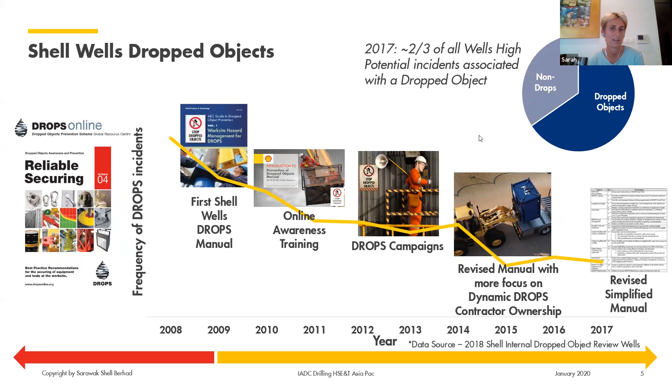Fortunately, very rarely do things land on people, and that's why we call it high potential, but it didn't actually reach its potential. So we got the answers to share to see what other companies see.

Yeah, they're on the screen. Should be. Are they not? No. Well, I can share that. Maybe you can just give us a... I'll do it again. Oh, there we go. Yeah, is there? Yeah, okay, great.

So similar to what you said, lifting and transportation of objects. So it's not just in Shell, it's good to see that it's actually a theme across the industry, which doesn't surprise me.

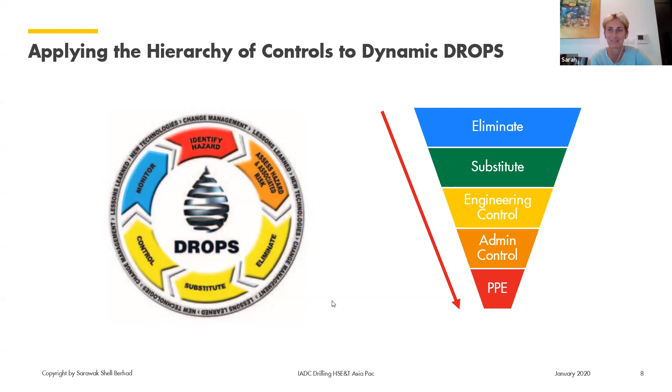Are the results on the screen now? Yeah, and now I can see them. Okay, so quite a lot of engineering controls—52% engineering controls, 44% eliminate. Okay, great, and a few admin controls. Okay, interesting.

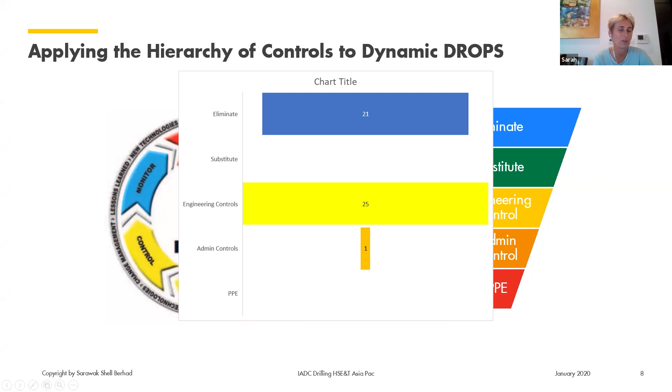Interesting, okay, so let me share the journey we've been on. Let me start with the next slide. If we talk about eliminate when it comes to dynamic dropped objects, this is the first program I'm going to talk about, called Let's Lift Less. This program was started by the Shell team in the UK operations. It's not a hard concept to understand: if you don't lift it in the first place, then you can't drop it. That's what we mean by eliminating—let's lift less.

Now, it sounds simple, but the team came up with six areas they wanted to concentrate on, rather than someone just saying 'No, I'm not lifting that.' Of course, we still need to be able to operate and drill our wells, so they came up with six areas. It goes through the whole life cycle of planning your work and your design, and you could say that actually this is really just good planning and management.

And it is, but it's putting that focus into actually the amount that we lift. If we lift less, we reduce our exposure. So changing the philosophy is embedded in that, and you want to put as much energy as possible into minimizing the lift. So don't put all the energy at the coalface, but think about it holistically from the bigger picture, and the energy you put into eliminating will pay off further down the line.

Deck management, obviously very important, having a deck plan, not playing deck chess, not moving things five times once it's on the rig. Put it where it needs to be and avoid moving it. But who do you need to collaborate with to make that work? Well, obviously the crews, they know where things need to be and where things need to go, and they'll also be fully aware of things you do that are crazy, that involve a lot of extra lifts.

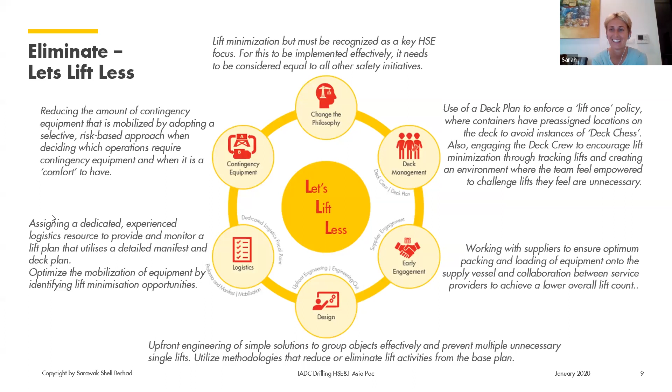Yeah, we'll share the results. Okay, yeah, 41% think we're doing more than 2,000 lifts a month, and that's right — we were doing just over 2,200 lifts a month on a jackup, so quite a lot.

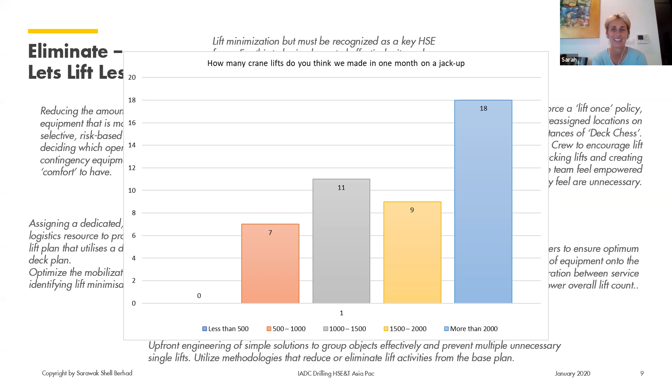So if you want to go to the next slide — it may seem quite crazy to count the amount of lifts we're doing, and trust me, it took some convincing to get the crane operator to count the lifts, because they don't really see what's in it for them. But what you're really trying to do is change this philosophy. If you don't measure something in the first place, how do you know you're getting any better? If you don't measure it, how do you communicate the size of the problem? When you're sitting in the office writing a drilling program and picking equipment, do you think this could involve 2,000 lifts and the exposure that gives to people?

Yeah, not necessarily. So you can see we split it up into lifts to and from the vessel, but also internal lifts. Some of the other sites split it up into deck lifts and lifts going to the rig floor, just to try and get that granularity to see what are the different lifting operations we're doing, and where potentially there's opportunities to minimise.

So part of their change in philosophy was all about counting. It's not a numbers game, but at the end of the day it gives visibility, and you can see the general trend. Obviously you're not doing the same operation every month, so it's not an absolute number, but the trend shows the improvements you're making.

When they looked at the 6 areas they wanted to focus on, some of the things they've been doing: we always do DWOPs for activities, but now when they're planning a well, they do a workshop, specifically around lift minimisation opportunities in each of their campaigns. They've been consolidating tools and loadouts from multiple service providers and multiple product lines into the same basket. On the design side, they've been mixing the mud onshore and sending it out pre-mixed rather than sending out chemicals and extra lifts, and working on backup tools, leaving stuff at the base if they can. It doesn't take that long to get to the rig, so really using a risk-based approach, and having an accurate deck plan and vessel deck plan has really helped them.

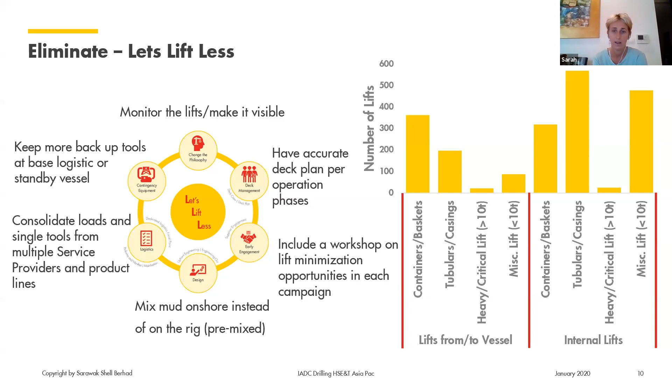Okay, let's go to the next slide.

So, substitutes - what does that mean? This is an example from Brunei, working with one of our service providers, Franks, running completions with a lot of control lines. On the left is typically what that would have looked like: 5 different control lines to run the completion.

That means we've got 5 sheaves hanging up there in the V-door, slung up. It also means to get those 5 lines next to the completion tubing, we need people to manhandle it in and get it around the clamp, so we've got 4 people there in the red zone at the rotary table.

Instead of that, on the right, you can see what we call the sheaveless - no sheaves in the derrick anymore, so we reduce them as a potential dropped object. We've got the sheaveless control line arm that helps install the control lines. You can see we've got rid of the sheaves, and the way it works also requires fewer people at the rotary table to get the cables in the right place, just by the way it manipulates the cables into position rather than coming from afar from the sheave.

Obviously you still need people because someone's got to put that clamp round - it's not that there are no people, but we've certainly reduced the risk. It's also faster, which everybody likes, so it's not just safer, it's faster as well. A nice solution on the substitute - we're still doing the same activity, but doing it differently.

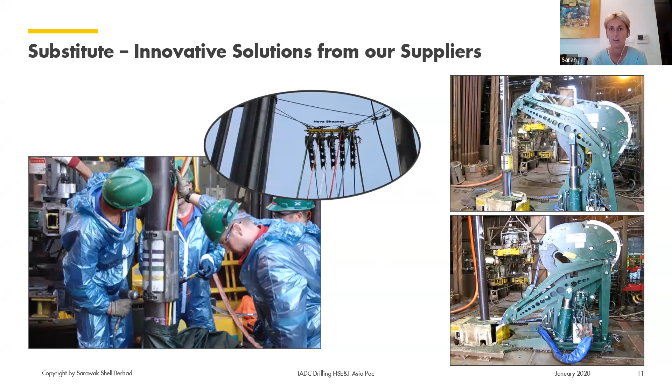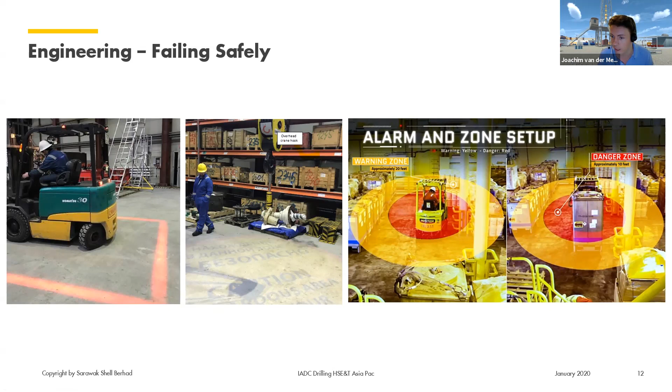At the very bottom of the hierarchy of controls is PPE, but just above that there is administration. We spend a lot of time in our industry working on administration controls, if we think about all the procedures and stuff we have. But here I've got a couple of examples of how we are trying to make those administration controls more robust.

The first one I'm going to talk about is called Own the Zone. Zone management, when it comes to dropped objects, has been around for a long time. It doesn't stop anything from dropping, but hopefully it keeps people out of the way should something drop. I think we're all pretty used to the rig floor being the red zone or the restricted access zone - you can't just walk up there when you want to. It's all about minimizing the number of people there, eliminating and reducing the amount of time they actually spend in the red zone.

All Own the Zone does is take it to the next level. It's not just for dropped objects on the rig floor, it goes to the whole rig site, and it covers more than drops. It can include any hazardous situation.

So it really makes sure that the hazardous areas are visually marked. It can be done through a sketch, through matting, through barriers, but making sure that people know where the hazardous area is. And then the next step, making sure that entry is controlled to that hazardous area - a singular entry and exit point where possible, and making sure access is controlled in and out.

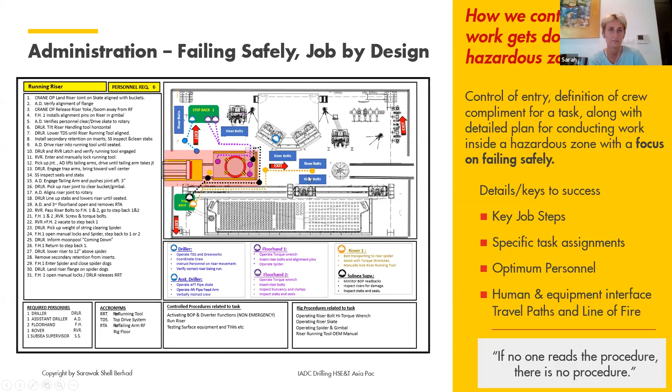So that was a very quick journey through our hierarchy of controls for dynamic dropped objects: eliminate, substitute, engineer things out, and then the last one, trying to improve our administration controls. So how did we do last year when we've been implementing these? I think some of the real highlights is that we started involving the full supply chain, which hopefully you can see through Let's Lift Less. A lot of front-end engineering involvement to deliver Goal Zero. For example, the sheathless control line arm - you can't get a piece of equipment like that from a service provider just like that. It takes a lot of energy from the front-end team to think about how they're planning the work. It's a real integrated approach to Goal Zero.

In the end, last year globally in Shell wells, we saw quite a significant reduction in the frequency of high potential dropped objects. So we felt that by putting our energy into dynamic drops, really thinking through the hierarchy of controls, we've made quite an improvement. But what I will say is the work's never done. It's always a risk, and it's something we've got to keep working on.